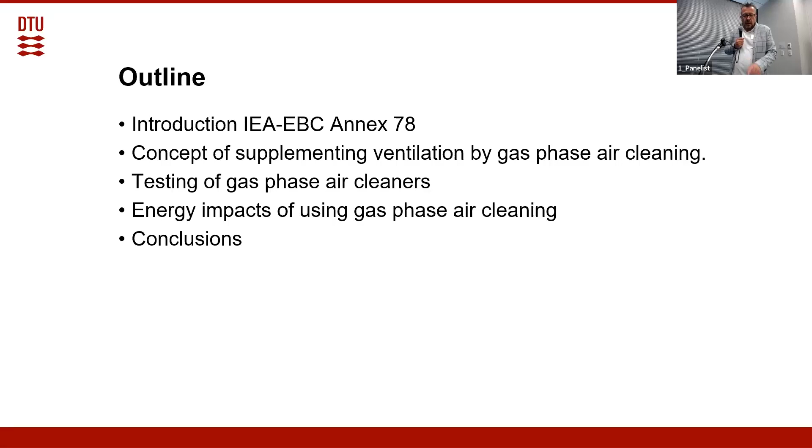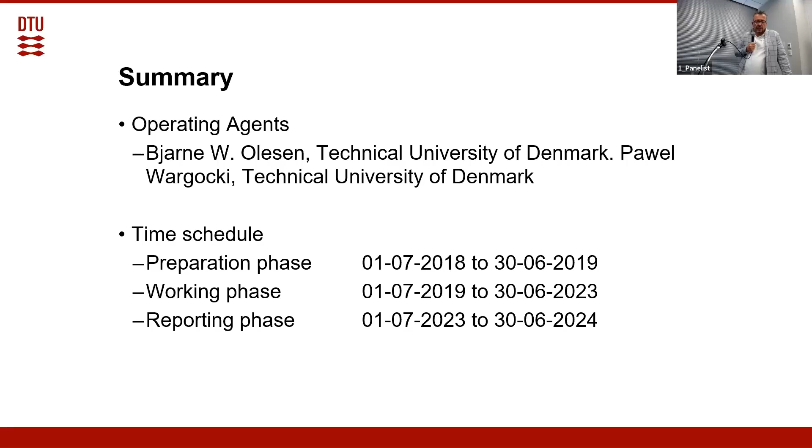There are 2 operating agents. Technical University of Denmark is the operating agent, and Professor Bjarne Olesen and myself are the operating agents of that annex. Our schedule is that we basically will complete our work next year in June, and then we will be moving into the reporting phase later this year.

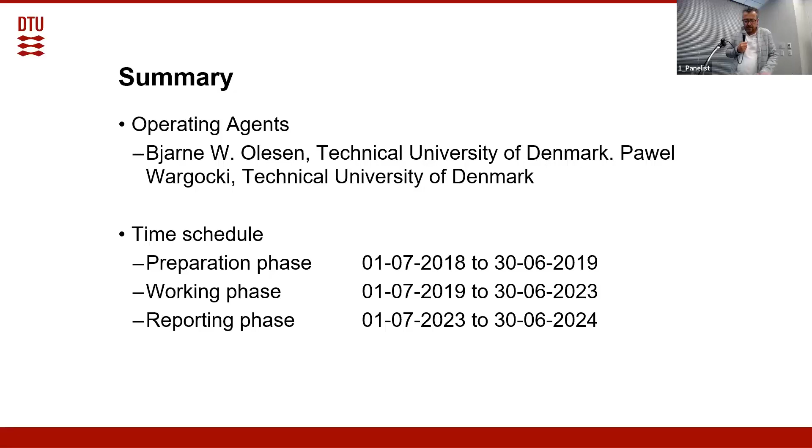So the structure of the annex is that there are several subtasks that will lead to understanding the importance of gas phase air cleaning with respect to energy. One subtask, with the subtask leader Alireza Afshari, who is present here in this room, is about the energy benefits of using gas phase air cleaning, basically trying to rate how much energy you can save by using a gas phase air cleaner.

And then subtask B, which I am the leader of, is to explain how we can partly substitute ventilation by air cleaning, basically providing the evidence on how much ventilation can be substituted by those air cleaners and how we can determine the amount of air that can be delivered compared to the ventilation.

And then there is subtask C, which is the testing of the air cleaners, with the subtask leader Paolo Tronville from Italy. This looks more into what is available with respect to the testing of gas phase air cleaners, and also what is the need for the development of new standards for gas phase air cleaners. I'll speak about this in a moment.

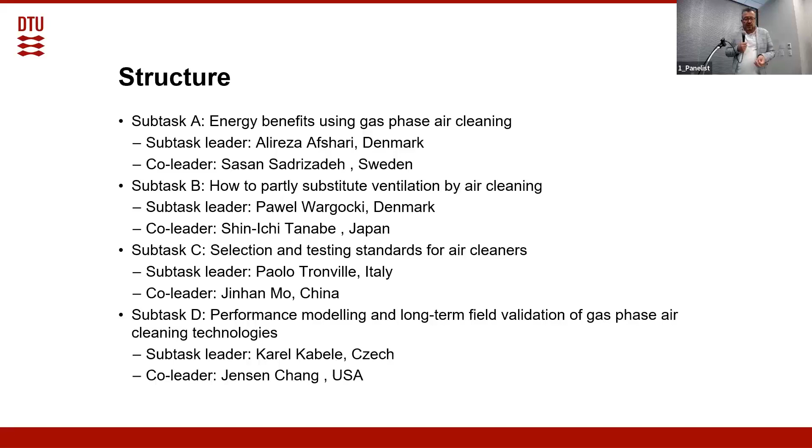Basically, the concept of that annex is taken from the concept of defining ventilation rates in both standard ASHRAE 62.1 and standard EN 16798, which is European. In this concept of those standards, the ventilation or the total outdoor air supply rate has two components: a people component and a building component.

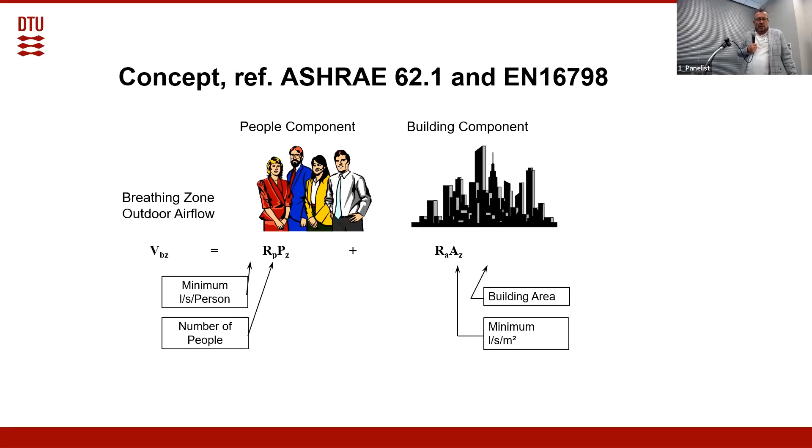By acting on any of those components, there could be a saving of energy. By acting on the people component, by removing gas phase from people, and by acting on the building component, we can actually replace or substitute some of the ventilation that is delivered by having the gas phase air cleaners. In order to do that, we need to estimate the clean air delivery rate for the gas phase air cleaners.

There are methods for estimating this, and there is a test method for assessing the performance of gas phase air cleaning media devices for general ventilation. It defines the clean air delivery rate based on the efficiency of the gas phase air cleaner.

It is based on the reduction of the concentration of a specific pollutant that is in the space, which should be removed by the gas phase air cleaner.

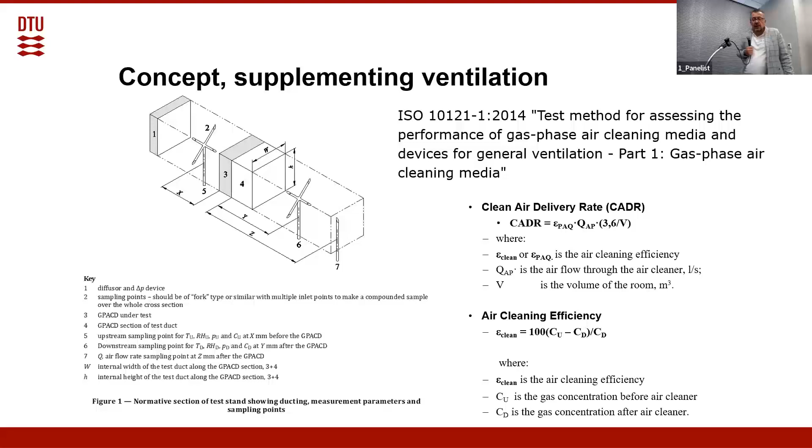However, if we look at the standards and methods for testing gas phase air cleaners, they basically use specific challenge pollutants to test the performance, and those are either single species pollutants or mixtures of pollutants, or sometimes even a metric called TVOC, which tries to look at the additive effect of all the volatile organic or gas phase pollutants in the space.

However, this testing does not take into account several aspects, among others, the aspect of byproduct generation.

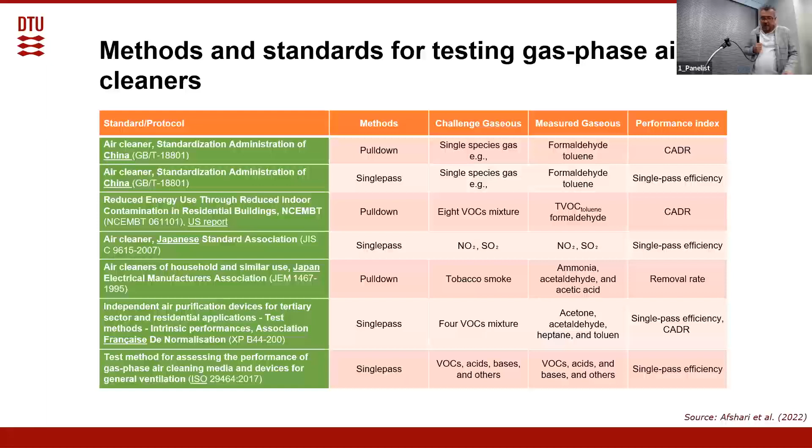So there are challenges in relation to gas phase air cleaners, and one of those challenges is that there are very few pollutants examined, which does not represent the actual atmosphere in buildings.

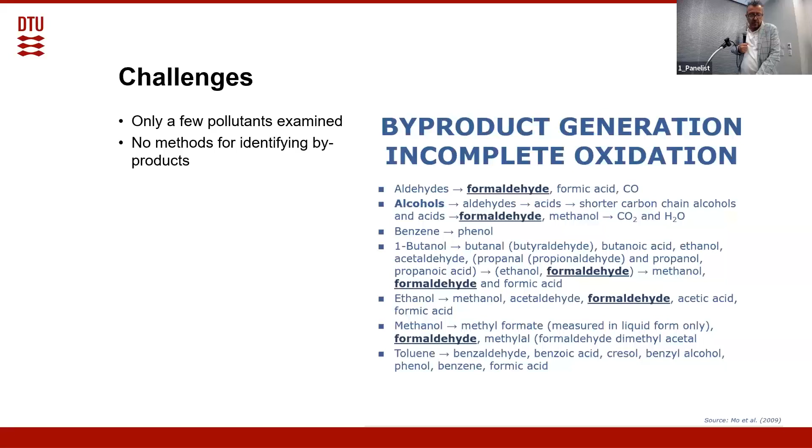This is why in the annex there is a need to develop other methods to be able to encapsulate the entire effect of the gas phase air cleaners.

If we go back to the standards, those standards are based on the acceptability of air quality, basically on perception. So we need to develop a methodology that will take into account the perception of air quality, and also account for the potential production of unwanted byproducts.

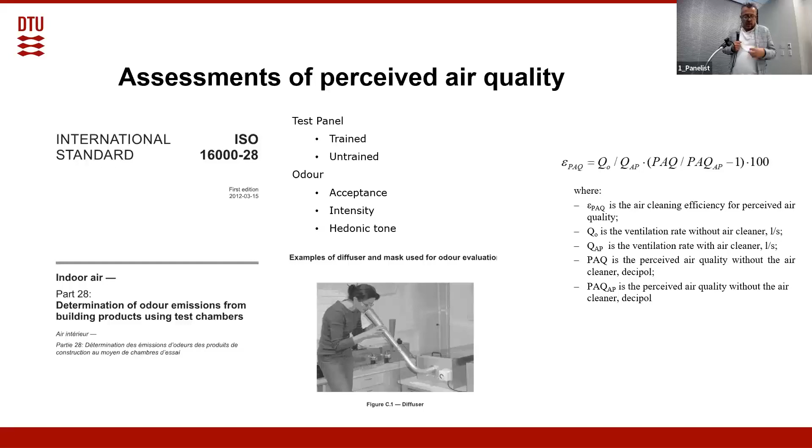Such a methodology exists, based on assessments of perceived air quality, and is actually included as one of the methods for testing building materials in ISO 16000. A similar approach can be used here, by determining the effect of the air cleaner in comparison with the condition without an air cleaner. We can then determine the outdoor air supply rate.

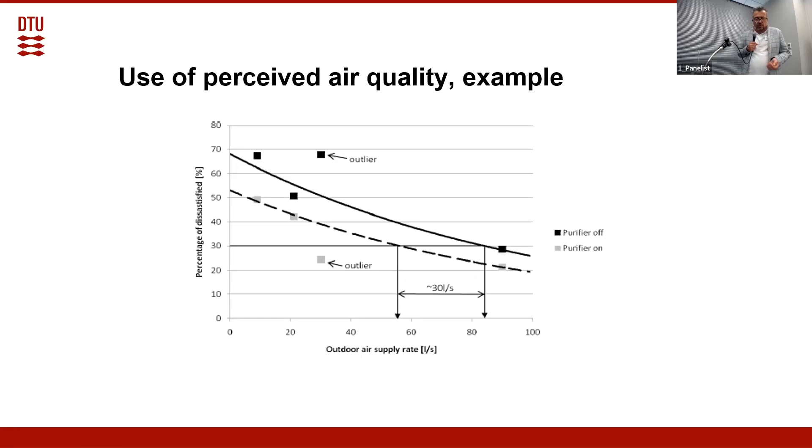Here is an example of the effect of ventilation on perceived air quality, and the effect of ventilation plus air cleaner on perceived air quality. To achieve the same level of dissatisfaction, we can reduce the ventilation by using the air cleaner, and that would define our clean air delivery rate.

So there are two examples now, as we are working on the methodology for how to do this. But a very important aspect of that annex is energy simulations. I don't have much time to speak about it, but this is just one example of modeling a standalone air cleaner that supplies clean air without any byproducts.

The idea is that we have two scenarios we want to model: scenario F3, which is building materials and people, and F1, which is only building materials. The idea is to improve the indoor air quality from category 4, defined as 40% dissatisfied, or category 3, which is 30% dissatisfied, to category 2, defined as 20% dissatisfied, according to standard EN 16798.

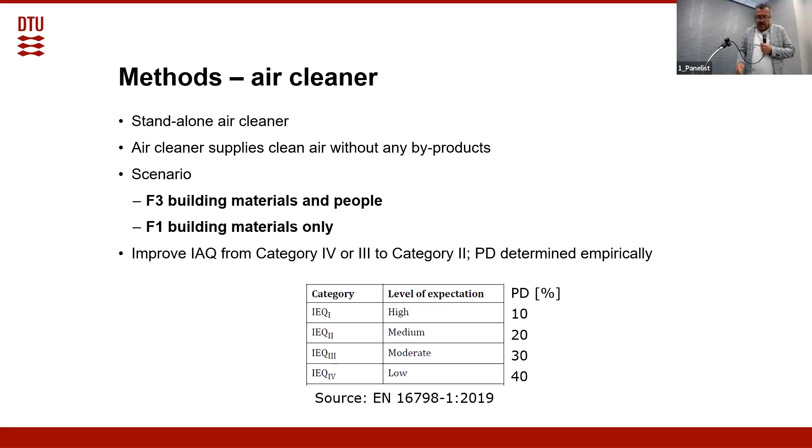This is because the gas phase air cleaners will not remove the CO2, but they will provide an additional effect similar to ventilation, without actually removing the CO2.

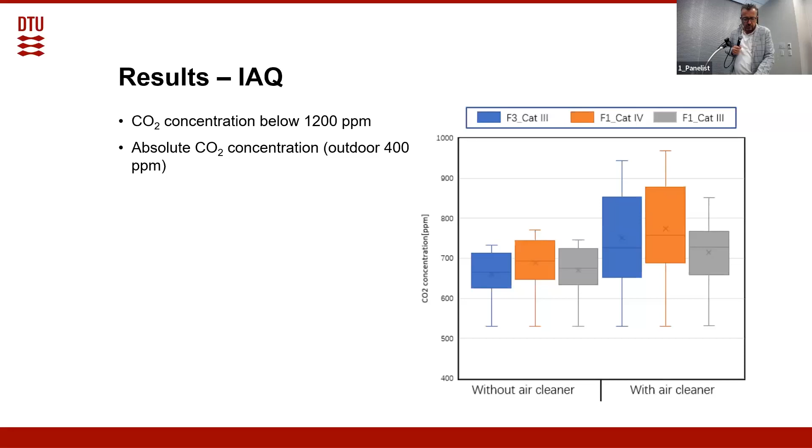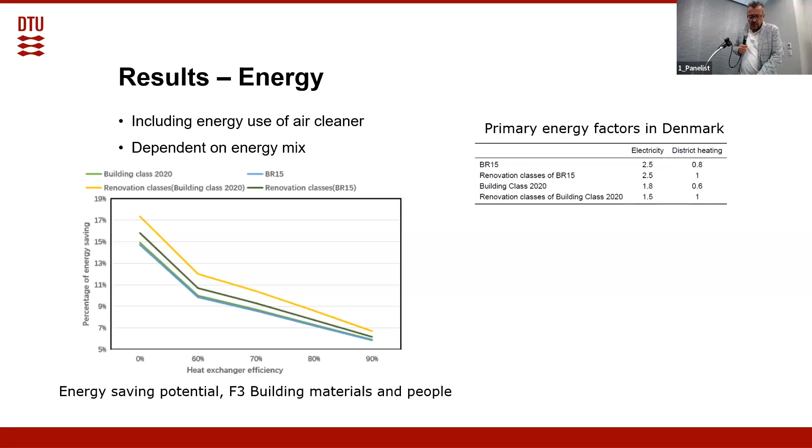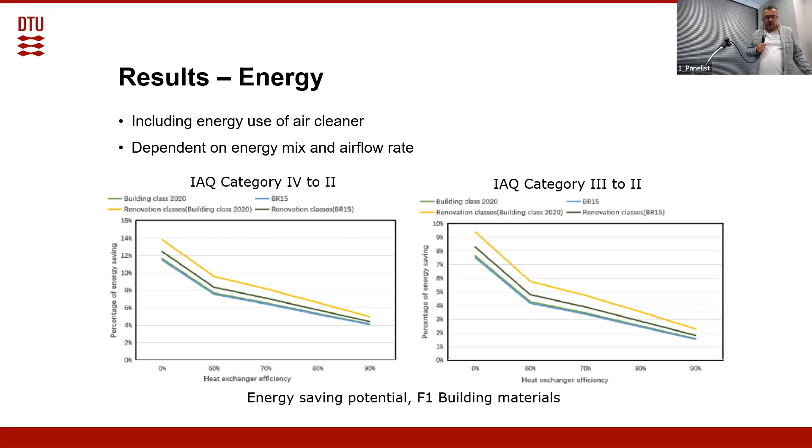These are a few other examples of results in which we modeled the use of the air cleaner. Depending on the energy mix and the use of the heat exchanger, the percentage of energy saving is low, below 20% on average, and even lower in some cases.

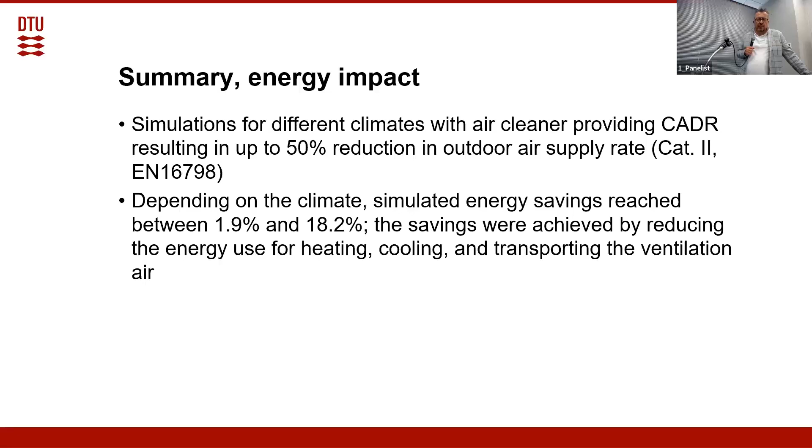So the simulations for different climates with the air cleaner providing clean delivery rate resulted in up to 50% reduction in outdoor air supply rate, but the energy savings reached a maximum of about 20%.

The other example I want to show is the development of a new standard for testing gas phase air cleaner performance. I'll finish this quickly.

In this idea, we try to develop the standard based on two-stage testing, using the sensory perception of air quality by humans.

In the future, the idea is to replace the sensory assessments by chemical measurements.

But at this time, we don't know which type of pollutants we need to measure to represent the effect on sensory perception. We believe we may be able to suggest something in the near future.

In the testing process, we propose two-stage testing. Stage one is basically a pass/no-pass stage with respect to the effect on indoor air quality.

This means we do not implement the complete testing of the air cleaner in case it may produce byproducts. So it's basically a check of whether the air cleaner is producing byproducts.

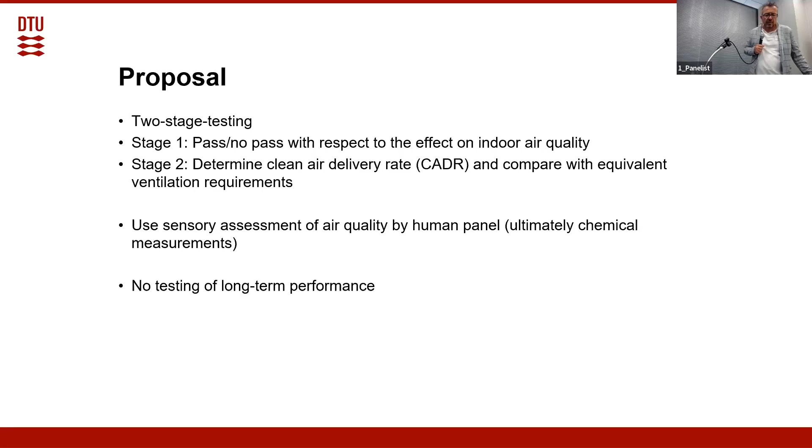Then, if the air cleaner is not producing byproducts, we determine the clean air delivery rate using sensory assessment. We performed some experiments in our labs using this approach.

These are three field labs with three different configurations, with and without air cleaners, and with people and building materials inside the field labs.

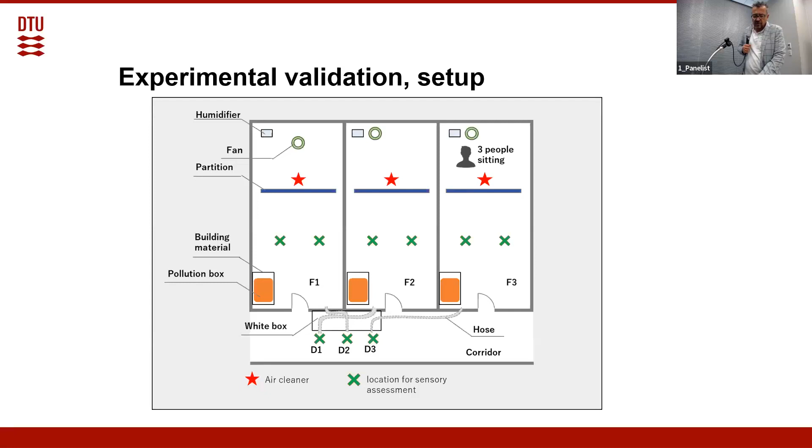So we had people entering the space and assessing air quality, and we ran different protocols.

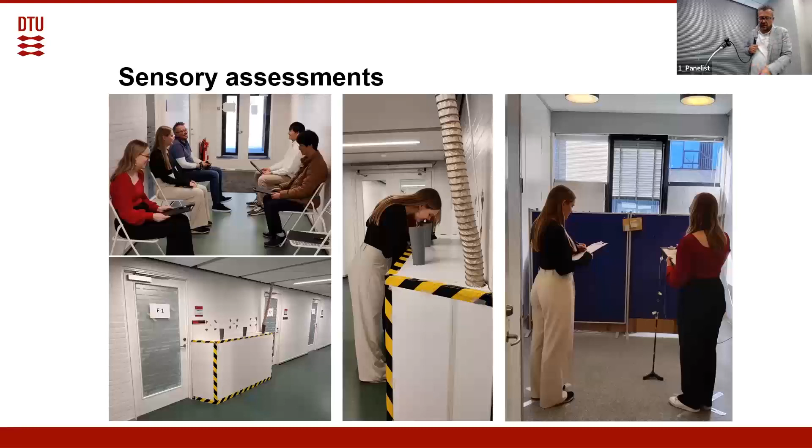This is an example of the stage 1 results, where we have an empty room without any pollution sources, and additional pollution sources with people and with building materials.

On the top line, you see the performance of the air cleaner that did not pass this stage. The acceptability of the air quality reduced when the room was empty, without pollutants, or with people, and showed only minor improvement in the case of building materials.

Whereas in the case of the second air cleaner, we see an improvement of the air quality and no reduction of air quality when the air cleaner is in operation.

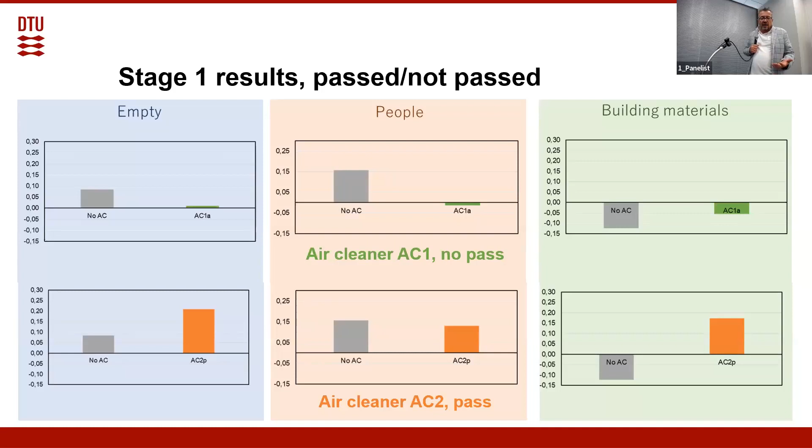So this is an example of how you can test which gas phase air cleaners can produce byproducts. We then tested those air cleaners under different conditions.

This is an example of testing the air cleaner with three different types of pollution sources: building materials, with people, and people alone.

We tested air cleaners at three different ventilation rates, and also with an additional number of units in the space.

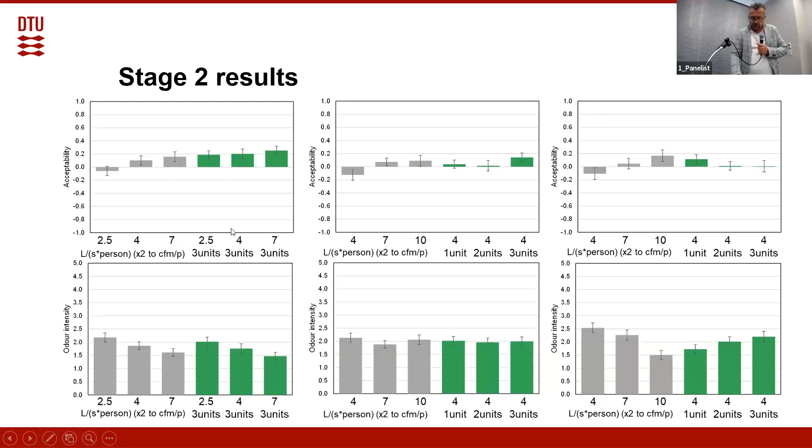So this is the development happening in our annex. We also do chemical testing to understand better and make a connection to the sensory testing.

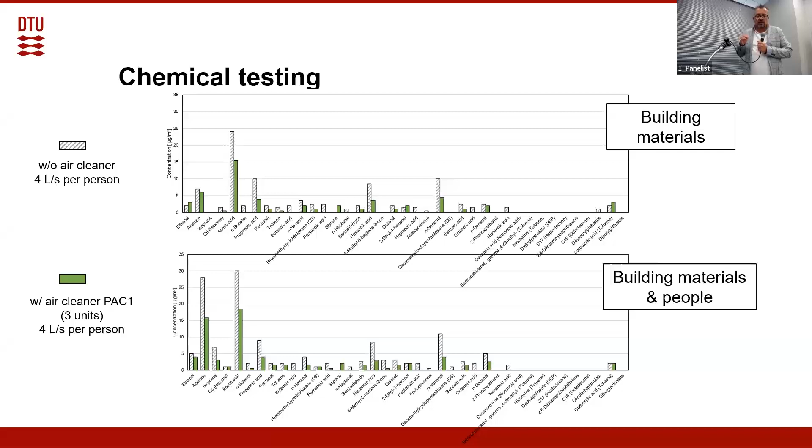We understand that sensory testing is very difficult, so we try to compare it and see whether there could be any pollutants that could represent the sensory response. I'll stop here — thank you very much, as the time is up.